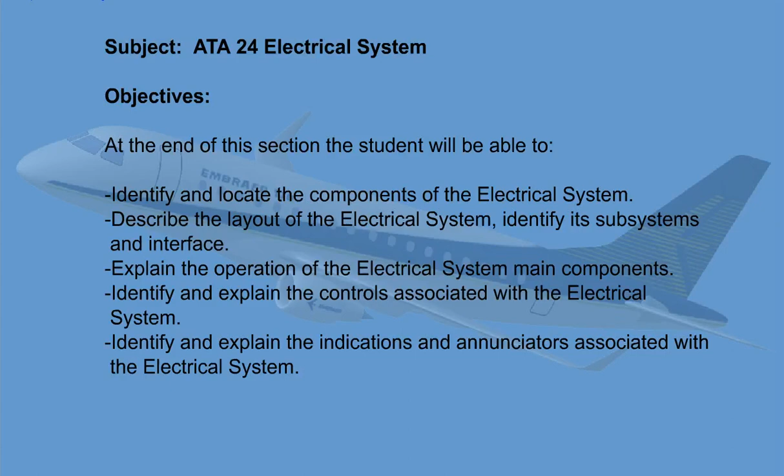The Electrical Power Generating and Distribution System, EPGDS, is comprised of AC and DC power sources. The AC system consists of two engine-driven integrated drive AC generators (IDGs), one auxiliary power unit-driven AC generator (APU generator), one ram air turbine-driven AC generator (RAT), and one AC external power input. The DC system consists of one DC external power unit and two nickel-cadmium batteries.

The EPGDS is normally operated in the automatic mode, whereby selection of the power source for each bus will be accomplished automatically.

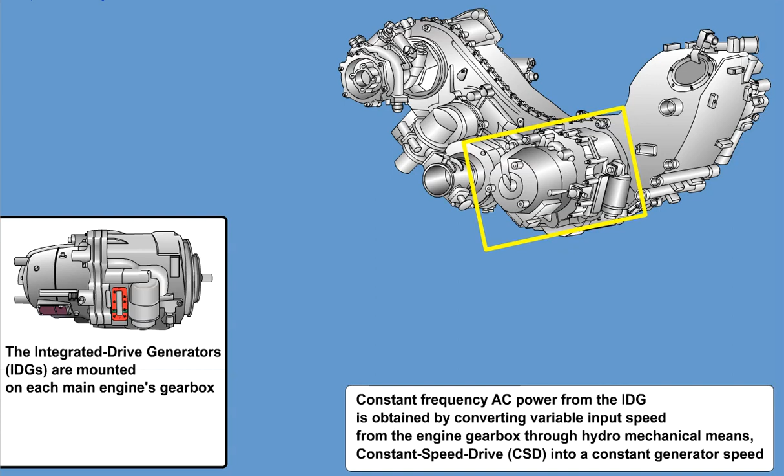The integrated drive generators, IDGs, are mounted on each main engine's gearbox. Constant frequency AC power from the IDG is obtained by converting variable input speed from the engine gearbox through hydromechanical means, constant speed drive (CSD), into a constant generator speed. The IDG operates at a rated 40 kilovolt amp, 115 volt AC, 400 Hz three-phase, with an input speed range of CSD 4618 to 8130 RPM and an output speed of CSD 12,000 RPM. The generator to the main engine gearbox uses a V-band mounting flange.

For safety, the IDG features an input shaft shear section. The IDG and CSD operation and lubrication oil system is connected to an external air-cooled oil cooler (ACOC) to maintain proper temperature. For maintenance purposes, the IDG requires visual inspection of the oil level, a changeable oil filter, and oil.

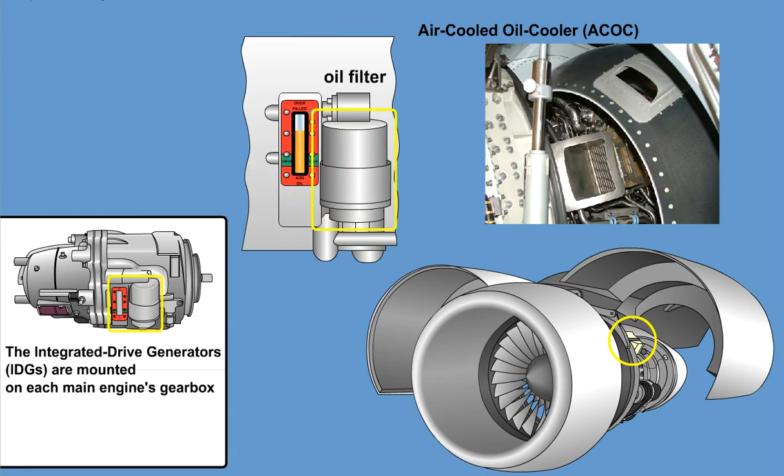Operation of the IDGs is monitored and controlled by the generator control units, GCUs. The two IDG selector knobs are located on the electric control panel in the cockpit and must be in the auto position during normal operation.

The auxiliary generator is mounted on the auxiliary power unit (APU). Constant 400 Hz frequency AC power is maintained by rotation of the generator with a constant APU engine speed. The APU generator is rated at 40 kilovolt amp, 115 volt AC, 400 Hz three-phase, at an APU engine output speed of 12,000 RPM. For safety purposes, an input shaft shear section protects the generator.

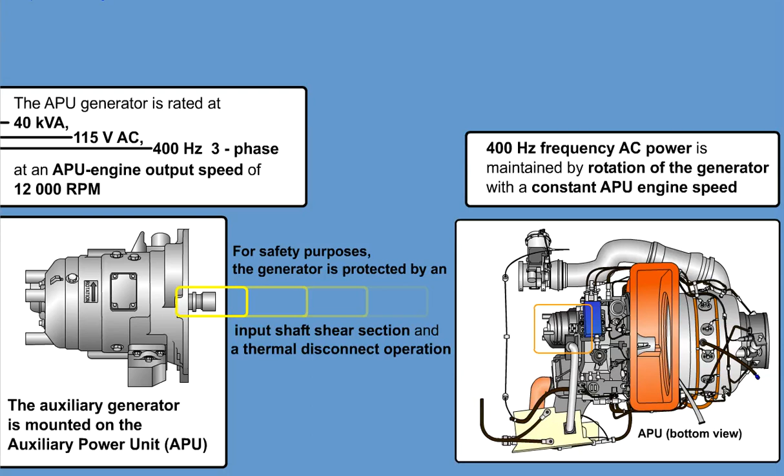The auxiliary generator lubrication system is integrated within the APU oil system. The APU generator control button is located on the electric control panel in the cockpit and must be in the latched position during normal automatic operation.

The ram air turbine system, also called the air-driven generator, is installed in a bay in the right side of the aircraft nose section. It provides emergency electrical power for the airplane in the event of a loss of all other sources of AC electrical power.

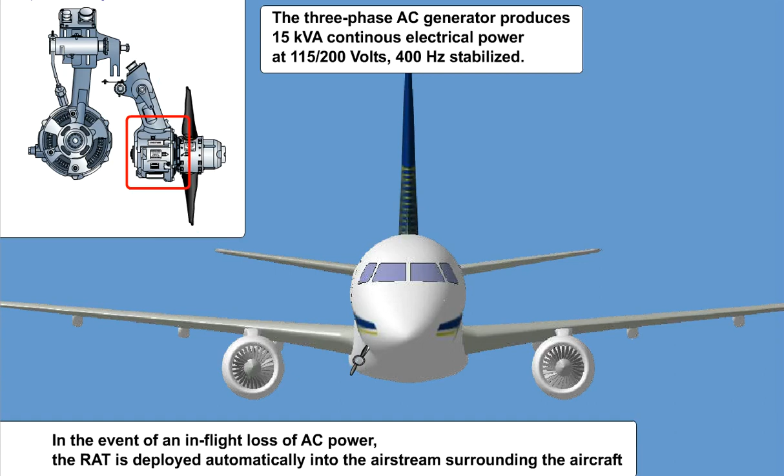In the event of an in-flight loss of AC power, the ram air turbine is deployed automatically into the airstream surrounding the aircraft. The kinetic energy of airflow across the turbine is converted into mechanical power to drive the AC generator. The three-phase AC generator produces 15 kilovolt amp continuous electrical power at 115 to 200 volts, 400 Hz stabilized. 400 Hz stabilization is accomplished by the automatic mechanically regulated variable pitch angle of the turbine blades.

The ram air turbine can also be deployed manually by a flight crew member using a deployment lever located in the console between the flight crew seats.

Electrical power from an external source may be supplied to the airplane through the associated AC or DC receptacle. Three-phase stabilized 115 volts AC 400 Hz is available. AC power is activated by switching on the ground service switch on the ground service panel. The operation status is indicated by illumination of the avail or in-use lamp. AC and DC ground service buses are powered independently of the other buses.

28-volt DC external power is on after activating the DC ground service switch, and will be indicated on the MFD synoptic page. This external power is used to start the APU. In case of releasing the parking brake with external power AC or DC connected to the airplane, the caution message GPU connected will be shown on the EICAS.

Two nickel-cadmium batteries, rated at 22.8 volt, 27 ampere hour, provide the essential loads in case of power failure of all generators. Battery 2 also provides power for APU start. Any available AC source will provide charging for both batteries.

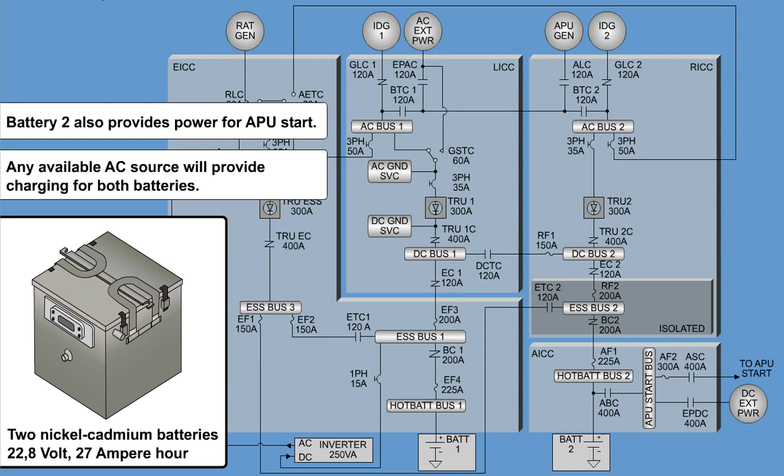The left and right integrated control centers are located in the temperature and pressure controlled mid-E bay. Access to this equipment is through the mid-E bay floor access hatch, located on the aircraft port side behind the left wing. Both integrated control centers provide control, protection, and distribution of primary AC and DC electrical power.

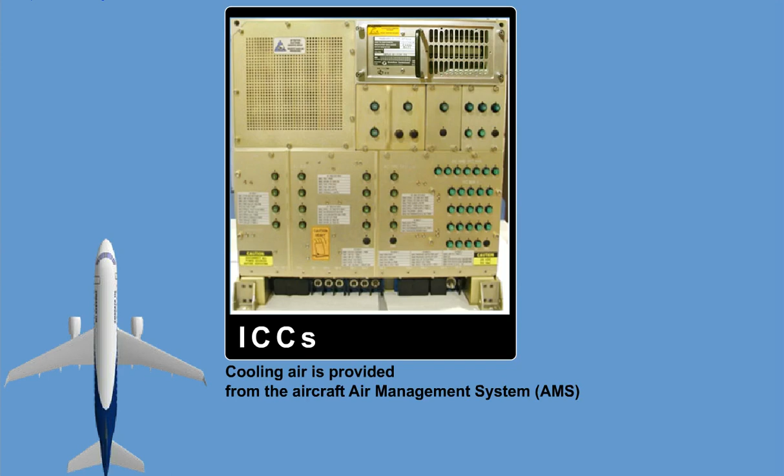The ICCs are mounted and bonded using 4 bolts through the 4 mounting feet. Cooling air is provided from the Aircraft Air Management System (AMS) and drawn through the TRU to ensure adequate heat dissipation.

All other ICC components are cooled by natural convection. All normal maintenance for removal and replacement of the TRUs, GCUs, EPM, contactors, relays, fuses, and circuit breakers is performed through the front of both ICCs.

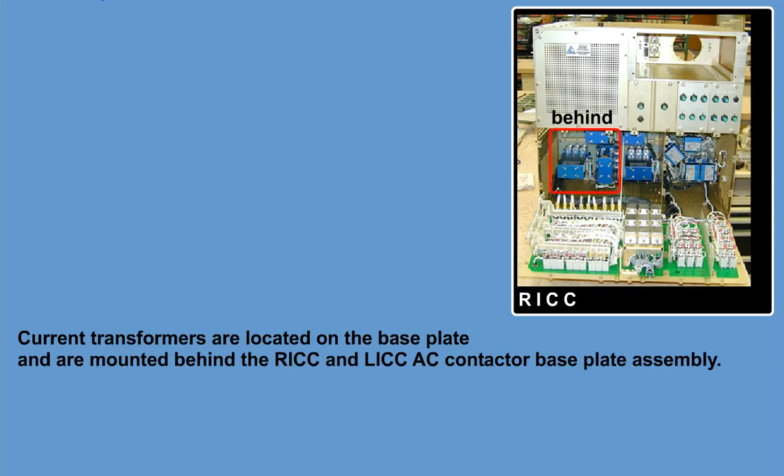The internal bus bars are not accessible without removing the entire integrated control center. The contactor baseplate assembly, terminals, and wire connections are not accessible. Current transformers are located on the baseplate and are mounted behind the right ICC and left ICC AC contactor baseplate assembly. Precautions should be taken to ensure proper electric power and that electrostatically sensitive device safety considerations are practiced while performing maintenance on the ICCs.

An ESD wrist strap should always be worn during removal of external power modules and generator control units, as these line replaceable modules are static sensitive modules.

The Emergency Integrated Control Center, EICC, is located in the temperature and pressure controlled forward E bay. Access to this equipment is through the forward E bay floor access hatch, which is located in front of the nose gear. The EICC provides control, protection, and distribution of primary AC/DC electrical power.

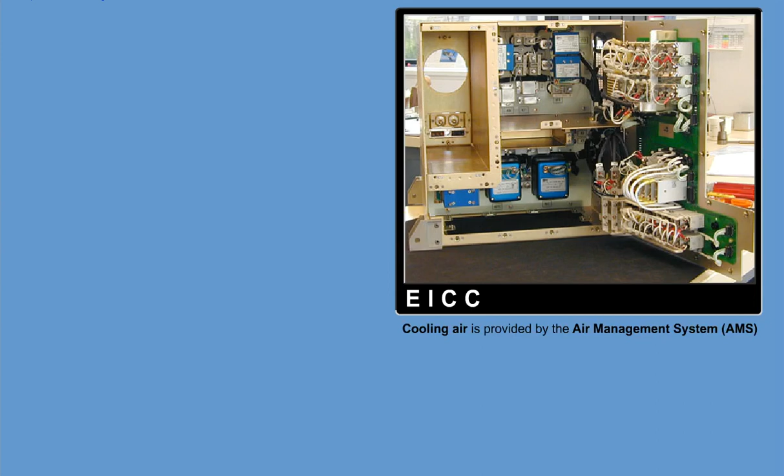The EICCs are mounted and bonded using 4 bolts through the 4 mounting feet. Cooling air is provided by the air management system and drawn through the TRU to ensure adequate heat dissipation. All other EICC components are cooled through natural convection.

All normal maintenance for removal and replacement of the essential TRU, contactors, relays, fuses, and circuit breakers is performed through the front of the EICC. Precautions should be taken to ensure proper power safety procedures are practiced while conducting maintenance on the EICC.

The Auxiliary Integrated Control Center, AICC, is located in the temperature and pressure controlled aft E bay. Access to this equipment is through an airplane panel located in the rear of the cabin. The AICC provides control, protection, and distribution of primary AC/DC electrical power.

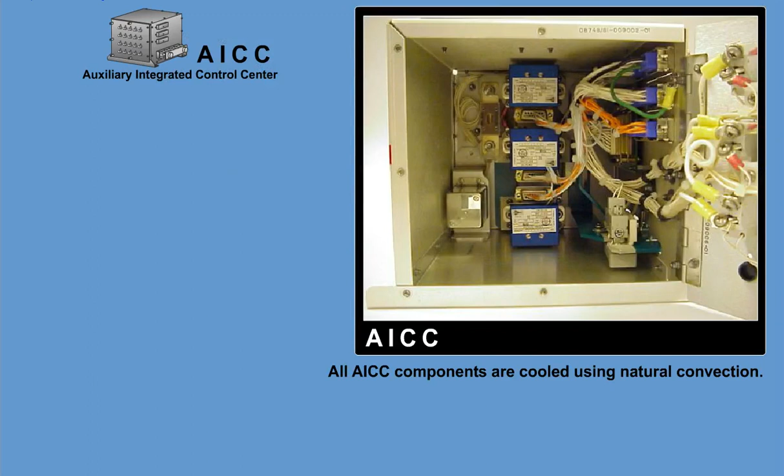The AICCs are mounted and bonded using 4 fasteners through the 4 mounting feet. All AICC components are cooled using natural convection. All normal maintenance for removal and replacement of the contactors, relays, fuses, and circuit breakers is performed through the front of the AICC. Precautions should be taken to ensure proper power safety procedures are practiced while conducting maintenance on the Auxiliary Integrated Control Center.

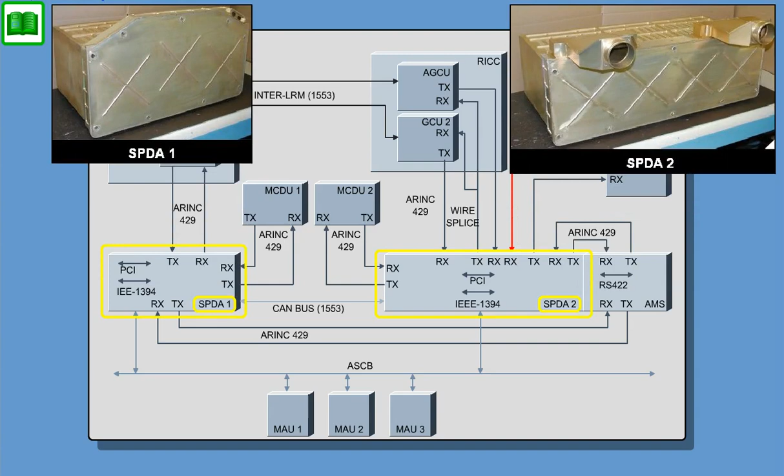Two secondary power distribution assemblies, SPDAs, are provided in the EPGDS, which interface with the Modular Avionics Units, MAU, the Integrated Control Centers, ICC, and various control display interfaces on the flight deck. These SPDAs are an integral part of the airplane utility management system to provide control and monitoring of several airplane systems.

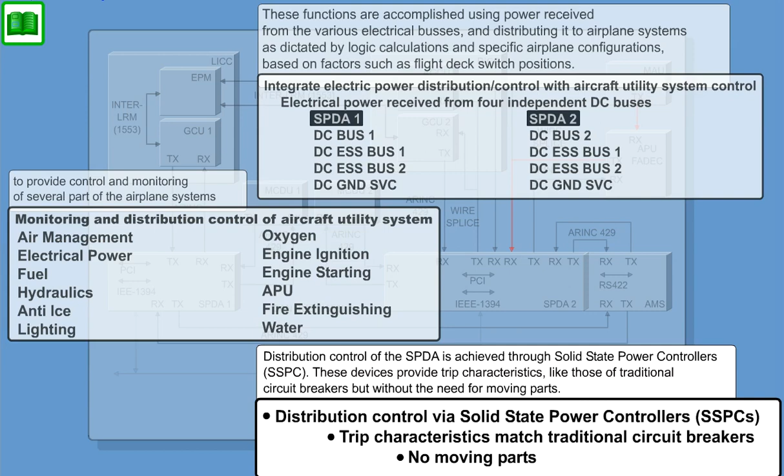These functions are accomplished using power received from the various electrical buses and distributing it to airplane systems as dictated by logic calculations and specific airplane configurations based on factors such as flight deck switch positions. Distribution control of the SPDA is achieved through solid-state power controllers, SSPCs. These devices provide trip characteristics like those of traditional circuit breakers, but without the need for moving parts.

The static inverter is located in the temperature and pressure-controlled forward E-bay. Access to the static inverter is through the forward E-bay floor access hatch, located in front of the nose gear. The static inverter is a line replaceable unit, LRU. The purpose of the unit is to convert 28-volt DC into 115-volt AC single-phase 400 Hz frequency stabilized power output.

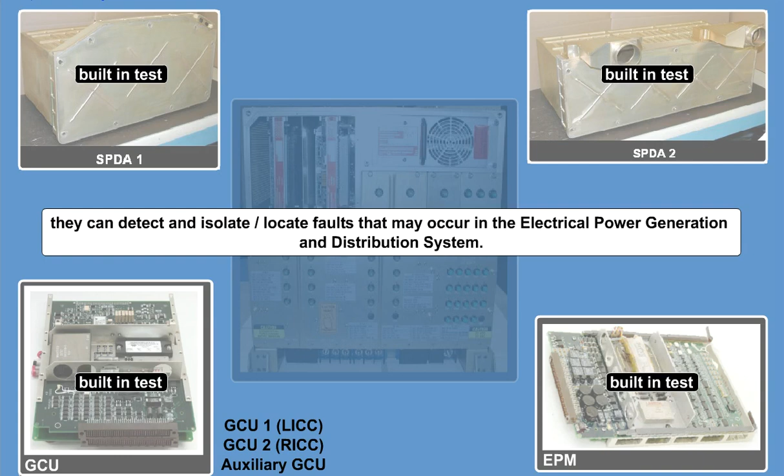The generator control units 1 and 2, the auxiliary GCU, the external power module, and secondary power distribution assembly 1 and 2 all have built-in test capabilities, which means that they can detect and isolate, locate faults that may occur in the electrical power generation and distribution system. This built-in test capability has 3 levels of functionality: continuous built-in test, fault-initiated test, and initiated test.

The central maintenance computer is a support tool for the technician, used to maintain reliability in aviation systems. The interface system section of the EPGDS is used to report faults or system status of associated member system units to the Central Maintenance Computer, CMC. The messages are presented on the ICUS display.

In normal operation, the information will be stored in a non-volatile memory when a fault is detected and confirmed. Some additional information such as airplane identification, date and time of flight, and flight phase will also be stored if this information is available from the airplane communication bus.

In maintenance operations, the CMC can command a member system of the airplane to perform initiated tests, to display system parameters, or upload memory contents of a member system.

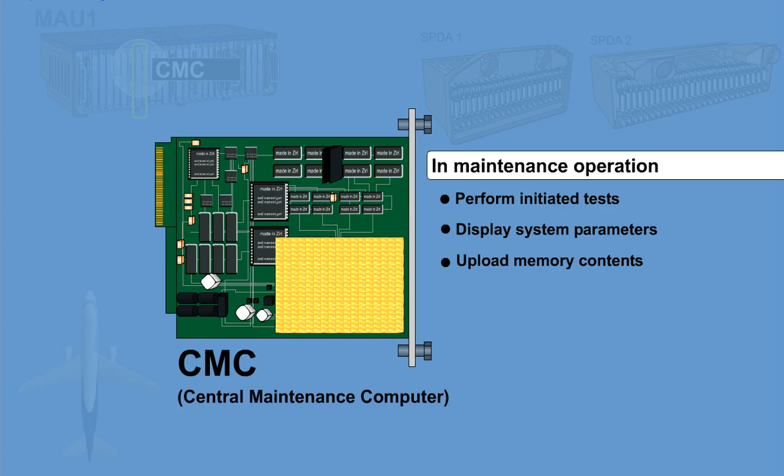Abnormal operational conditions of the EPGDS will be presented as an associated crew alerting system, CAS message, to the flight crew on the ICUS display.

35 CAS messages have been implemented in the system controller logic, including the GCU1, GCU2, AGCU, EPM, SPDA1, SPDA2, and associated MAUs. 6 of the messages have been designated at a warning level, 26 at a caution level, and 3 have been designated at an advisory level.

To ensure sufficient redundancy exists during dispatch per minimum equipment list rules, backup secondary controllers have appropriate logic for supporting the generation of necessary CAS messages.

The controls of the electrical system are on the overhead cockpit control panel and have 2 subsystems: the electrical AC system and the electrical DC system.

The IDG selector knobs allow control of the IDGs. Positioning the selector knobs in a normal auto position will allow automatic operation of the electric power generation and distribution system, EPGDS. If the selector knobs are in the off position, IDGs will be tripped offline and de-excited.

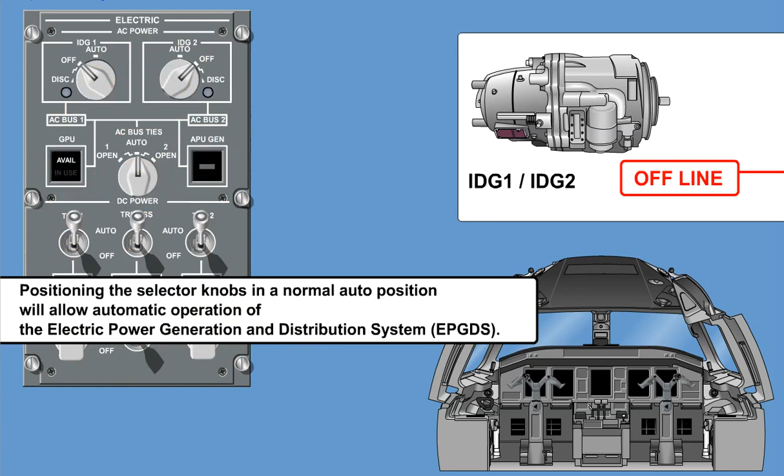An amber LED illuminates beside the associated selector knob to indicate which IDG has failed. By selecting the knob to the disc position and holding it for 1 second, the IDG will be mechanically disconnected. Note, only authorized maintenance personnel on ground can reset a disconnected IDG.

The ground power unit switch allows activation of the external AC power unit, AC GPU, from the flight deck. This switch controls the external power AC contactor, EPAC, part of the Left Integrated Control Center, LICC.

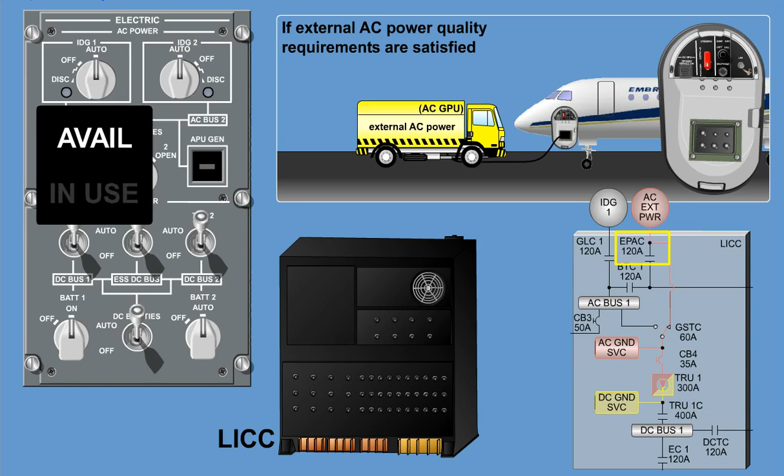If external AC power quality requirements are satisfied, but the GPU switch is in the unlatched position, then the GPU avail lamp will be illuminated and the EPAC de-energized open.

Moving the GPU switch from an unlatched position to the latched position will allow automatic EPGDS operation for powering with external AC power. And if power source priority conditions are met, the EPAC will close.

If the GPU switch is latched when external power is applied to an unpowered aircraft, cycling the GPU switch from an unlatched position to the latched position will be required for automatic EPGDS operation. Once the EPAC closes, the GPU avail lamp will extinguish, and the GPU in use lamp will illuminate.

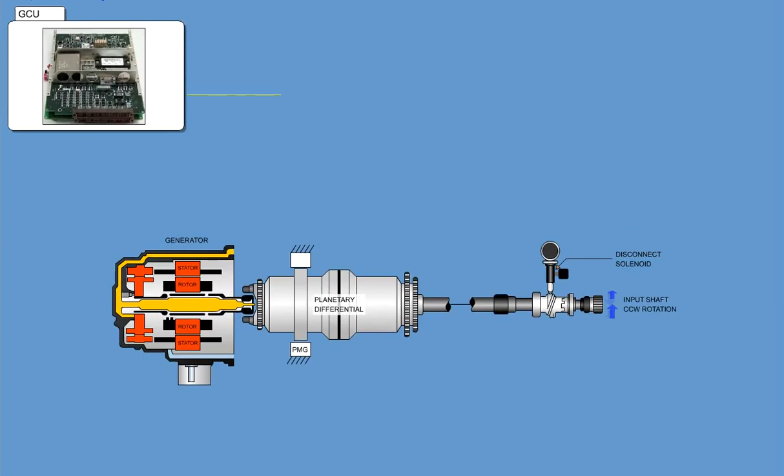The GCU supplies an electrical signal to a servo valve inside the CSD. This servo valve then controls, through a control cylinder, the hydraulic log unit, which operates in a clockwise or counterclockwise direction. Because the hydraulic log unit is connected to another input of the planetary differential gear, the generator RPM increases or decreases less than the input shaft RPM. As a result, the generator frequency stays constant.

The hydraulic log unit operates at 240 to 280 psi pressure. This oil pressure is maintained by a charge pump and charge relief valve. The charge oil is also used to cool and lubricate the generator and the other CSD components. It is not part of the engine oil circuit. The oil flows between 7 and 12 gallons per minute.

Drain oil from the generator and sump is supplied through a scavenge filter to an external oil cooler by 3 pumps, which are driven by the accessory drive gear on the planetary differential gear at a constant speed. These pumps are the generator scavenge pump, sump scavenge pump, and the inversion scavenge pump.

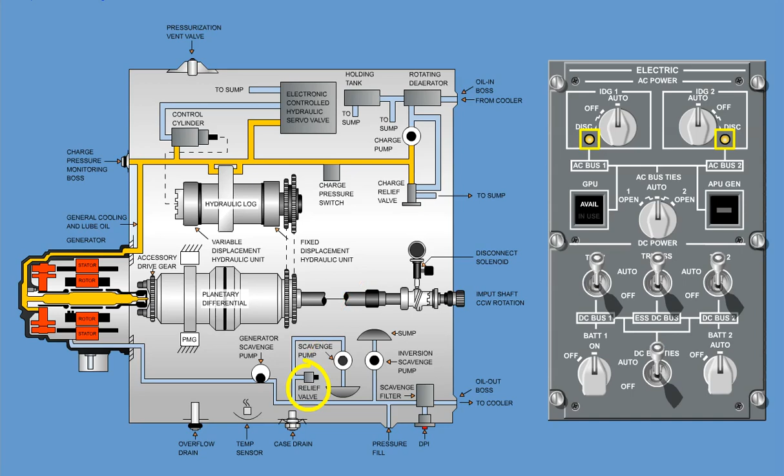The entering oil passes through a rotating deaerator. This device extracts air from the oil with centrifugal force. The deaerated oil exits the deaerator discharge and enters the charge pump. The overflow oil leaving the deaerator that does not feed the charge pump fills a holding tank inside the CSD housing. The holding tank is an all-attitude reservoir designed to assure a continuous supply of oil charge and lubrication oil through all flight attitudes, including negative G conditions.

In case of malfunction, the IDG can be manually disconnected through a switch located on the cockpit control panel, controlling the electric-mechanical disconnect mechanism, which is part of the IDG input shaft. This mechanism consists of a solenoid-operated, spring-loaded disconnect plunger, camshaft, and reset ring.

The manual disconnect should be performed if the associated cockpit IDG disc amber indicator light and/or the IDG oil CAS message is displayed. These indicate low oil pressure or high oil temperature in the IDG.

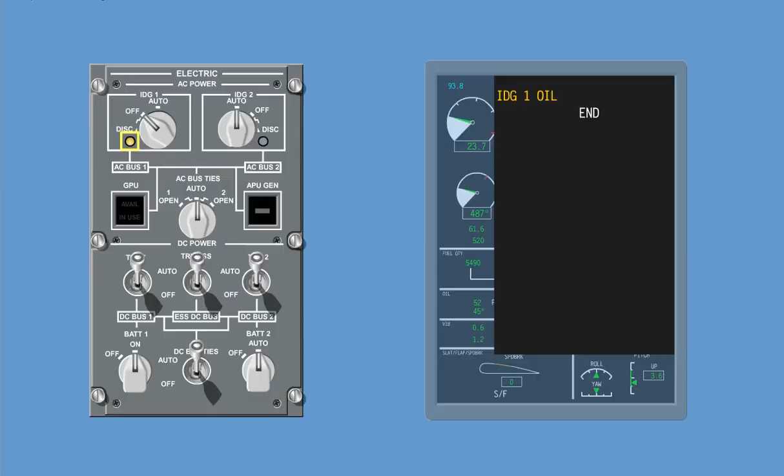In case the operational oil pressure in the IDG drops below 140 plus or minus 25 psi, the charge pressure switch inside the CSD closes. The GCU interprets this as a low oil pressure condition.

In case oil temperature in the IDG sump, sensed by the temperature bulb, reaches 335 degrees Fahrenheit (168 Celsius), an IDG over temperature condition is interpreted by the GCU. In both cases, the GCU will send a corresponding signal over ARINC 429 to the associated SPDA.

The SPDA illuminates an amber lamp on the IDG disc switch. This lamp illuminates if the following SPDA input signals are active: IDG over temperature signal or low oil pressure signal, and IDG not already disconnected, and IDG input speed greater than 4,500 RPM, which senses that the engine is running.

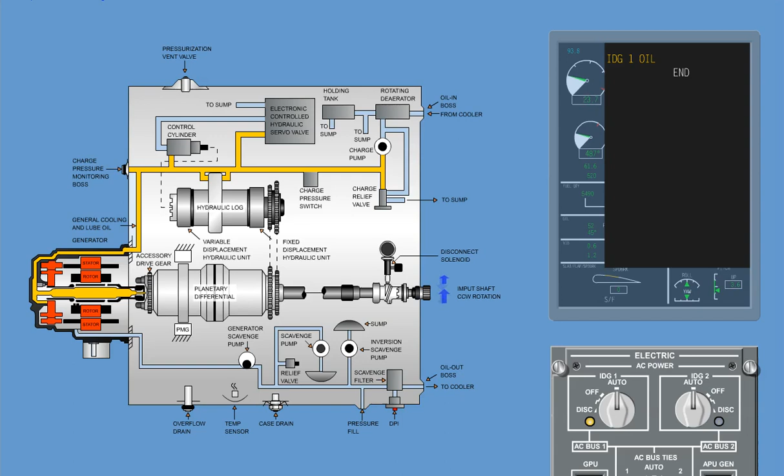Illumination of the lamp indicates which IDG has failed. By selecting the switch to the disc position for more than 1 second, the disconnect mechanism inside the CSD provides a means of separating the transmission and generator shaft from the IDG input shaft.

Selecting the switch to the disc position causes the solenoid pin to retract. This action releases a plunger which engages the cam on the transmission shaft. As the shaft rotates, the plunger rides along the cam, moving the shaft axially away from the input shaft. The IDG input shaft part remains engaged with the drive spline of the gearbox.

A signal is also passed over ARINC 429 to the respective GCU to trip the generator control relay and the generator line contactor.

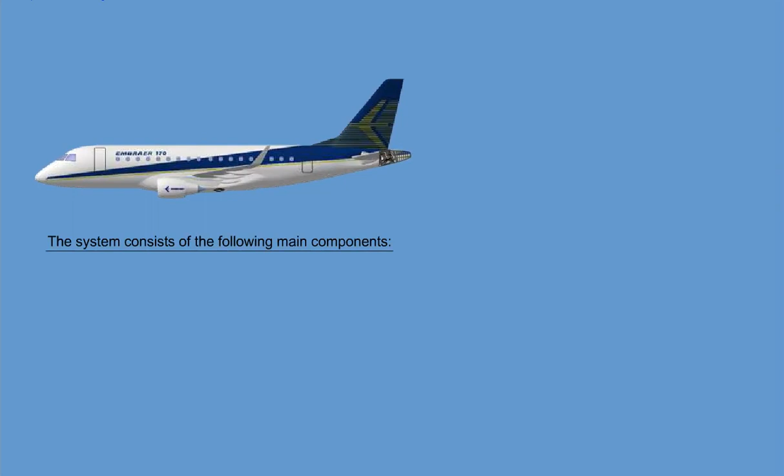The APU AC generation system is used primarily when the airplane is on ground, or as a backup source in flight. The system consists of the following main components: the generator unit (auxiliary generator), the generator control unit (auxiliary GCU), the line contactor (ALC), the current transformer (auxiliary generator CT), the APU generator switch, and the crew alerting system.

The APU auxiliary generator is a 4-pole, 3-phase, brushless type, oil-cooled constant-speed generator, and is rated at 30 to 40 kVA, 115 to 200 volts AC, 400 Hz.

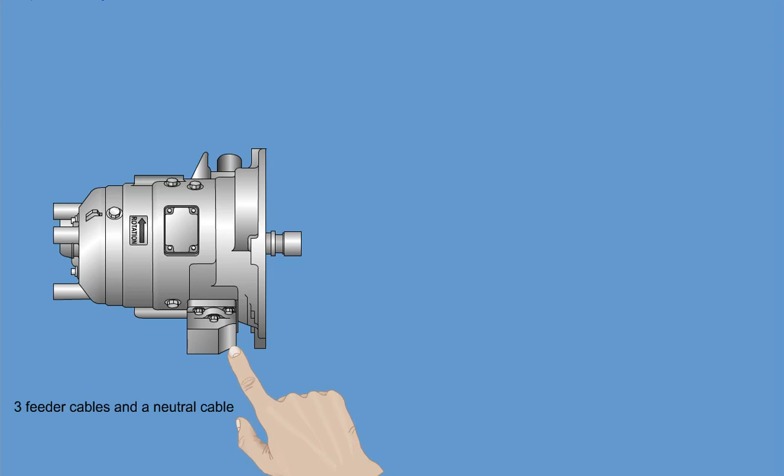The auxiliary generator is installed on the gearbox of the auxiliary power unit. The generator unit and a seal plate are mounted to the gearbox via threaded studs with washers and nuts. 3 feeder cables and a neutral cable are attached to the main terminal block of the generator.

An external connector provides AC output signals from the permanent magnet generator (PMG) stator to the generator control unit to adjust the exciter field DC voltage. For safety, the generator is protected by an input shaft shear section.

The auxiliary generator control unit is a line replaceable module, LRM, and is located in the Right Integrated Control Center, RICC.

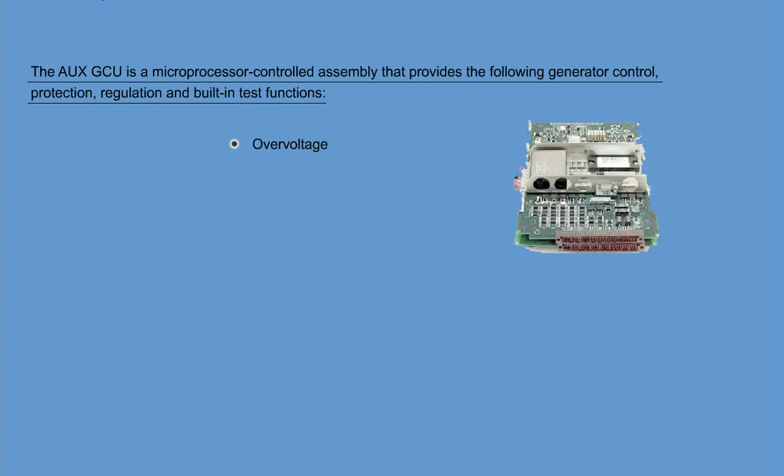The auxiliary GCU is a microprocessor-controlled assembly that provides the following generator control, protection, regulation, and built-in test functions: over voltage, under voltage; over frequency, under frequency; over current; phase sequence; differential fault; shorted internal wiring; shorted rotating diode system; inadvertent paralleling trip; open phase, and failure of the central processing unit of the GCU.

If a fault occurs, the GCU will command the auxiliary line contactor to open and stop AC power supply to the aircraft AC power system.

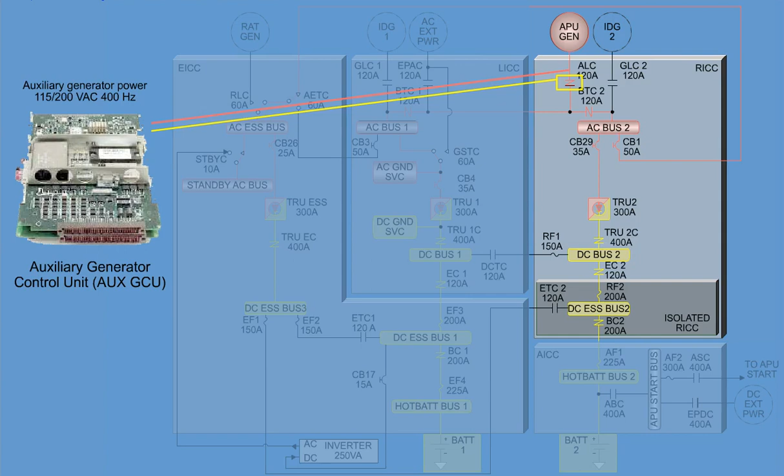The auxiliary generator line contactor is a line replaceable module located in the Right Integrated Control Center. The ALC is normally held open by the auxiliary generator control unit. When the auxiliary GCU has determined that the auxiliary generator power is at 115/200 volts AC, 400 Hz, it sends a signal to close the auxiliary generator line contactor, which allows the auxiliary generator to supply AC power to AC bus 1 and AC bus 2.

The two-position APU generator switch, located on the electrical control panel, controls the APU generator. In the normally latched position, the auxiliary generator operates automatically and provides power to the aircraft AC distribution system. The status lamp of the switch is off in this position.

In the unlatched position, the flight crew can manually de-energize the auxiliary generator, which opens the generator control relay, GCR, and the auxiliary line contactor, ALC. This position is indicated by illumination of a striped bar.

The emergency AC generation system provides emergency electrical power for the airplane in the event of a loss of all other sources of AC electrical power. The AC emergency system supplies the AC Essential Bus.

It consists of the following main components: the ram air turbine, the integrated control center, and the associated generator control unit.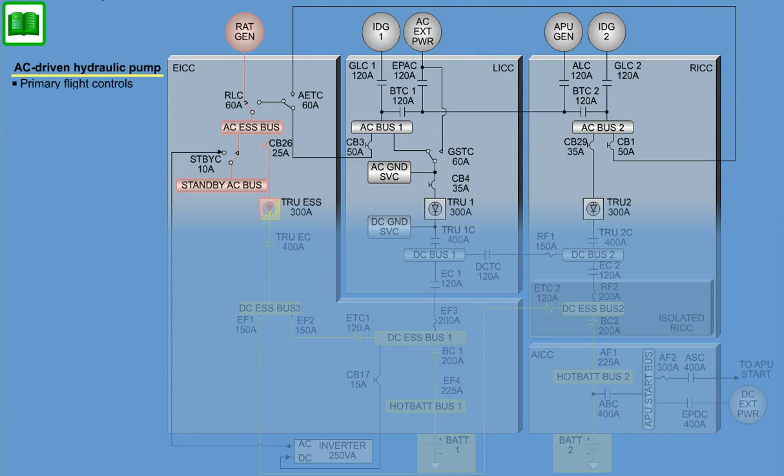In case of loss of AC electricity in flight, the ram air turbine AC power will provide the following airplane systems: the AC-driven hydraulic pump for the primary flight controls and the landing gear, the engine exciters, 1A and 2A, the operation of the essential lighting system, and the operation of the essential avionics and communication equipment.

The ram air turbine, RAT, system, also called the air-driven generator, ADG, is installed in a bay in the right side of the aircraft nose section. It provides emergency electrical power for the airplane in the event of a loss of all other sources of AC electric power.

In the event of an in-flight loss of electric power, the RAT is deployed automatically into the airstream surrounding the aircraft. The kinetic energy of airflow across the turbine is converted into mechanical power to drive the AC generator.

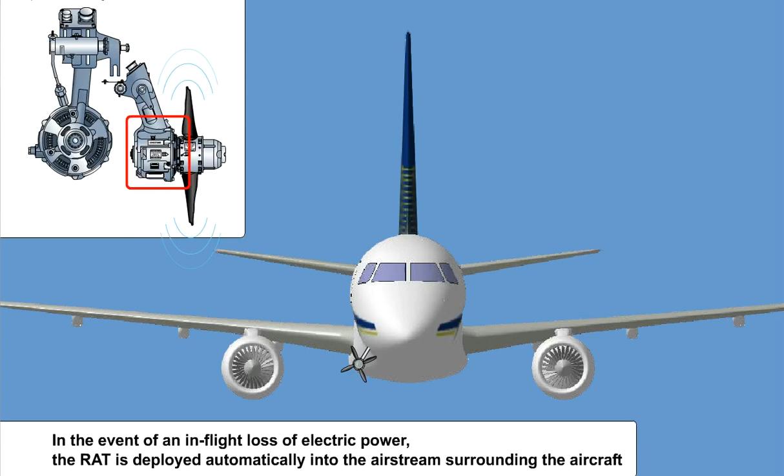The turbine assembly consists of two turbine blades connected to a mechanical governor, installed inside a hub housing assembly, which is connected to the generator shaft.

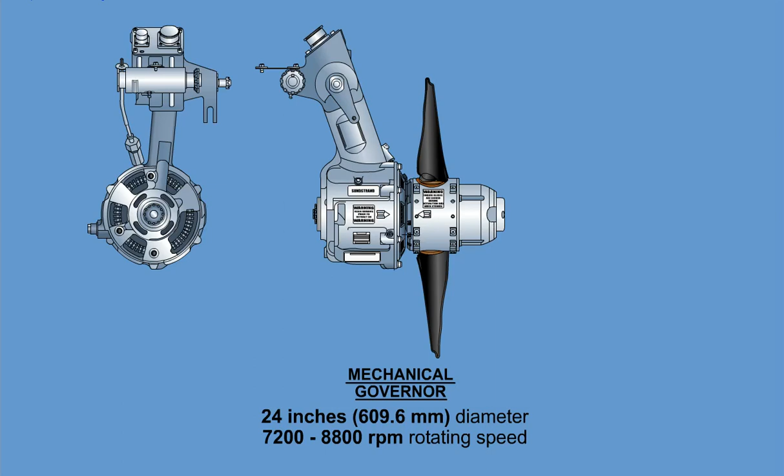The outside diameter of the turbine blades is 24 inches, 609.6 millimeters. The mechanical governor maintains the rotating speed of the turbine within 7,200 and 8,800 RPM by the automatic mechanical regulated variable pitch angle of the turbine blades. This rotation speed depends upon the airplane airspeed, altitude, and electrical load.

The air-driven generator assembly is a three-phase, air-cooled brushless AC machine. It produces 15 kilovolt amp continuous electrical power at 115, 200 volts, 360 and 440 hertz.

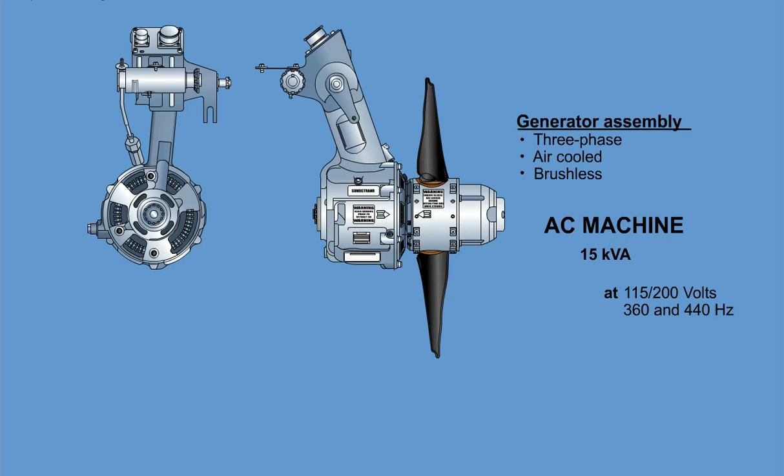The ram air turbine deploys automatically in case of an airborne loss of AC power from both AC buses. The ram air turbine can also be deployed manually by the flight crew using a deployment lever located in the console between the flight crew seats.

The distribution of emergency AC power is controlled and monitored through contactors, circuit breakers, relays, and protections, which is provided by the ram air turbine generator control unit and the emergency integrated control center.

The main stator in the generator of the ram air turbine has an electrical heater installed to prevent moisture from freezing in the air gap between the stators and rotor during cold temperatures and icing conditions. This feature helps assure smooth startup at deployment.

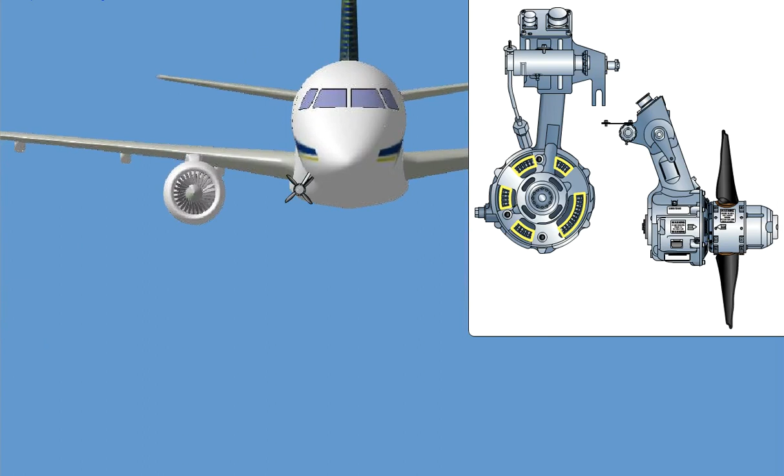The ram air turbine will remain deployed and operational during the entire flight and the landing phase. After a ram air turbine system inspection procedure, maintenance technicians can restow the ram air turbine with the restow pump.

The static inverter is located in the temperature and pressure-controlled forward E-bay. It can be accessed through the forward E-bay floor access hatch located in front of the nose gear.

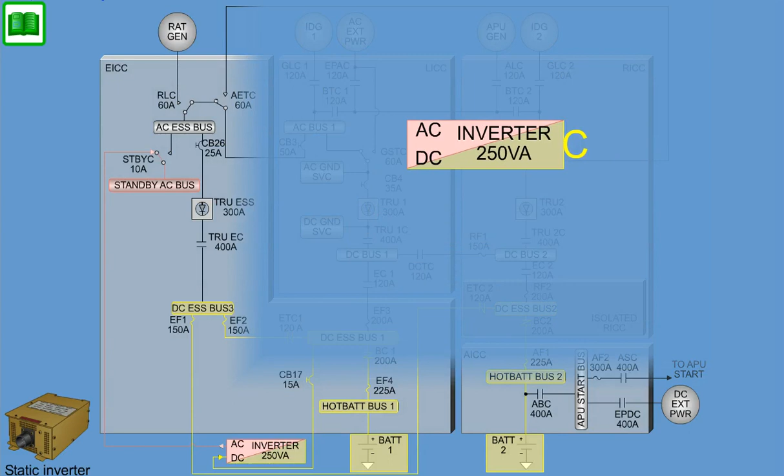The static inverter is a line-replaceable unit. Its purpose is to convert 28-volt DC into AC in order to provide the standby AC bus with single-phase 115 volts RMS, 400 Hz AC stabilized power output.

The capability to convert DC into AC is 250 volt amps of electrical power.

Operation of the inverter is controlled by Secondary Power Distribution Assembly 1. This unit controls the on-off logic of the static inverter, based upon the inverter's internal fault monitor and the number of AC sources available during in-flight operation.

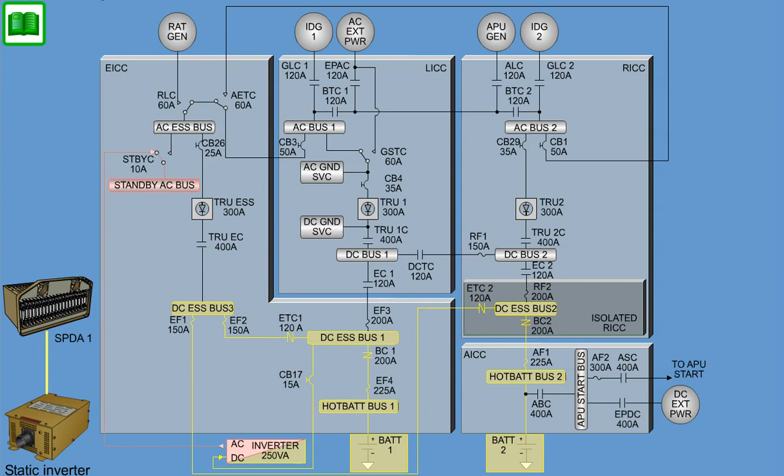SPDA-1 will set the inverter to off status during normal operation of the Electrical Power Generation and Distribution System, EPGDS. SPDA-1 will set the inverter to on status in case only one main AC source is available: IDG1, IDG2, or the APU generator.

If the internal fault monitor of the inverter detects a problem, a discrete status signal will inform the SPDA-1 to shut down the inverter.

DC power is generated by 3 transformer rectifier units, 2 accumulator batteries, or an external DC power connection.

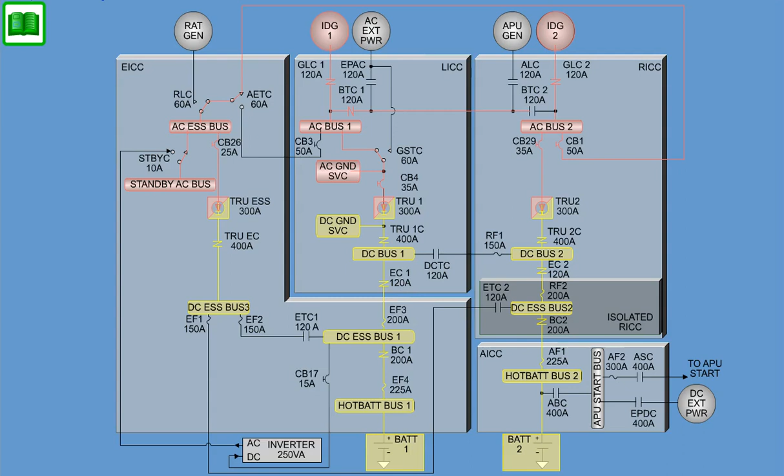For operation of DC-powered airplane equipment, the conversion from AC power to DC power is provided by 3 transformer rectifier units. Batteries 1 and 2 are used to back up all DC buses to ensure continuous supply for DC loads. Battery 2 also provides energy necessary for an APU start.

DC external power is provided by a ground power unit, GPU, and is only used to perform an APU start.

The DC system of the airplane operates on 28-volt DC stabilized. There are 3 transformer rectifier units as main DC power sources. The TRUs are located inside the associated integrated control centers.

There are also 2 nickel-cadmium batteries and 1 external DC power plug.

DC power is generated by conversion of AC to DC by the TRUs to supply the associated DC bus. The input of each TRU is 115 volt AC, 400 Hz frequency stabilized, and the output is 28 volt DC regulated up to 300 amps of current.

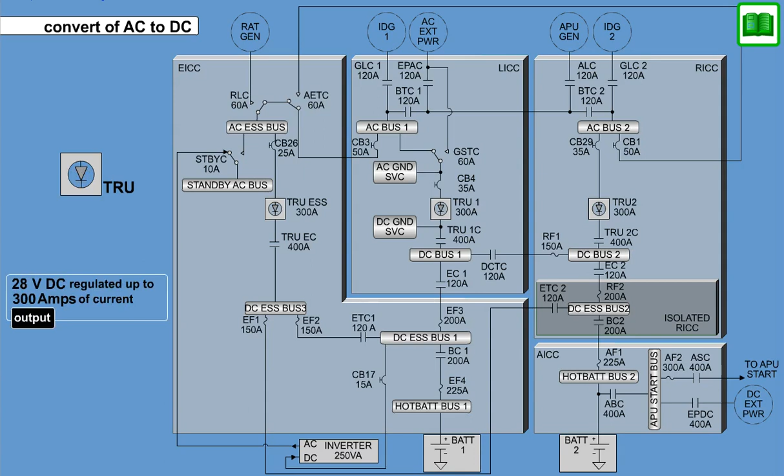Both nickel-cadmium batteries have 19 accumulator cells. Battery 1 is located in the forward E-bay, and Battery 2 is located in the aft E-bay.

In normal operation, any available power source will provide charging current for batteries 1 and 2, except for the DC external power. Both batteries are in operation to back up all DC buses, ensuring a break-free environment for DC loads. Battery 2 also provides electrical power for an APU start through the APU start bus when the electrical system is automatically isolated from Battery 2.

The only function of the DC external power is to supply DC power to the APU start bus for an APU start. External DC power is controlled by dedicated system relay logic.

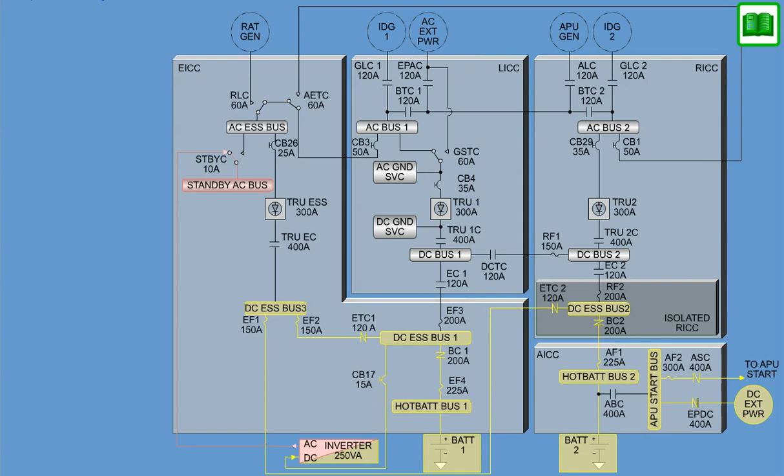Two nickel-cadmium NiCad accumulator batteries are provided for powering essential loads if transformer rectifier unit power is not available. Batteries 1 and 2 are used to back up all DC buses, to ensure a break-free environment for DC loads.

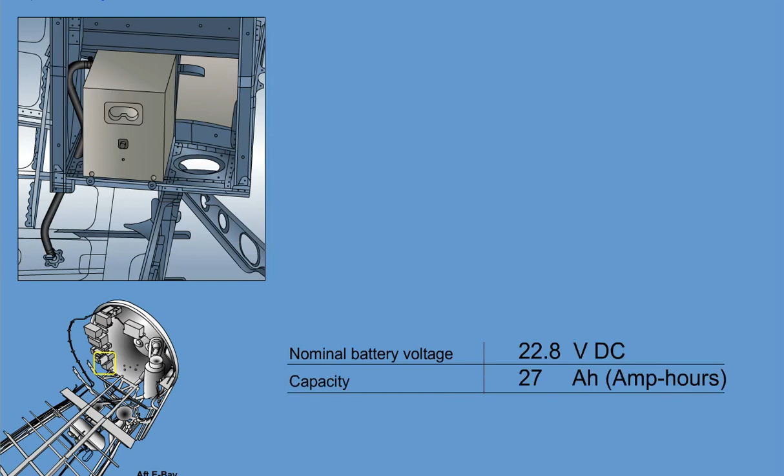Each battery consists of a steel case containing 19 semi-open NiCad cells. The cells are connected to each other in series by copper bus bars. The nominal battery voltage is 22.8 volts DC, with a capacity of 27 amp hours, at a 1-hour discharge rate.

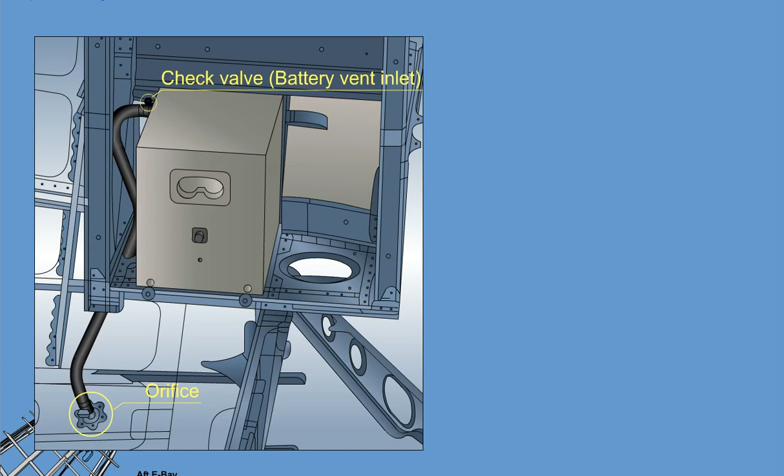Adequate battery ventilation is provided through a tube interconnecting the battery venting nozzle to the fuselage surface. A calibrated orifice close to the fuselage and a check valve on the battery vent inlet assure that gases emitted by the batteries under normal or abnormal conditions will not accumulate in hazardous quantities.

Battery 1 is located in the forward E-bay directly below the SPDA-1 unit. It provides stored energy to selected equipment during normal operations and during flight in the absence of all other airplane electrical power. Battery 2 is located in the aft E-bay.

It also provides the power used for an APU start through the APU start bus during ground or flight operations, when the electrical system is automatically isolated from Battery 2.

Each battery is fitted with 2 temperature sensors, which are continuously monitored by the modular avionics units. Both sensors are used to provide continuous indication of battery temperature to the multifunction display, and to display an EICAS warning message, battery overtemp, in red if battery limits are exceeded.

The higher of the 2 temperature values sensed is the one utilized for indication and alarm. Whenever a battery over temperature condition is sensed, the pilot should isolate the battery from the charging source.

Battery over temperature will never generate sufficient heat to damage the battery's surroundings, including those caused by a short circuit at its terminals or to any of its cells. Any mechanical deformation of the battery will be contained within its steel case.

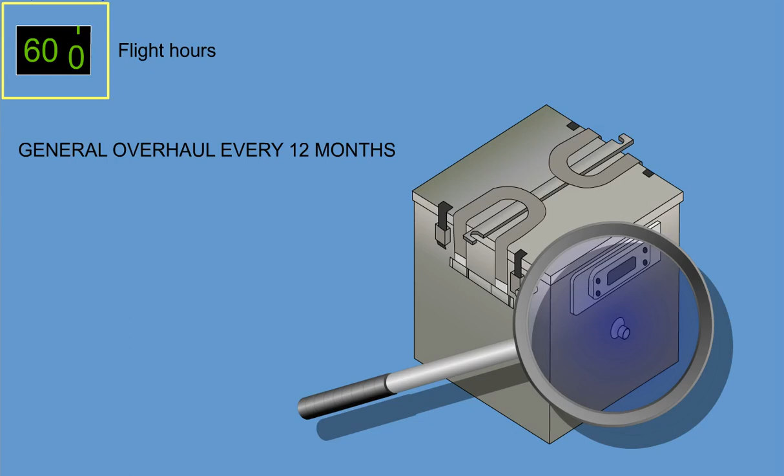Maintenance requirements for the battery include a regular check every 600 flight hours and a general overhaul every 12 months. The battery must be removed from the airplane for both the regular check and the general overhaul.

The regular check consists of the following: exterior cleaning, voltage check, nut tightness check, discharge and shorting of all cells, insulation check, recharge, adjustment of electrolyte level, capacity check, and cleaning of battery vents.

The general overhaul consists of the following: voltage check, nut tightness check, discharge assembly and shorting of all cells, thorough cleaning and inspection of all components, check of the thermal sensors, replacement of faulty components, assembly of all battery components, insulation check, recharge and adjust the electrolyte level of all cells, capacity check of battery, and cleaning of battery vents.

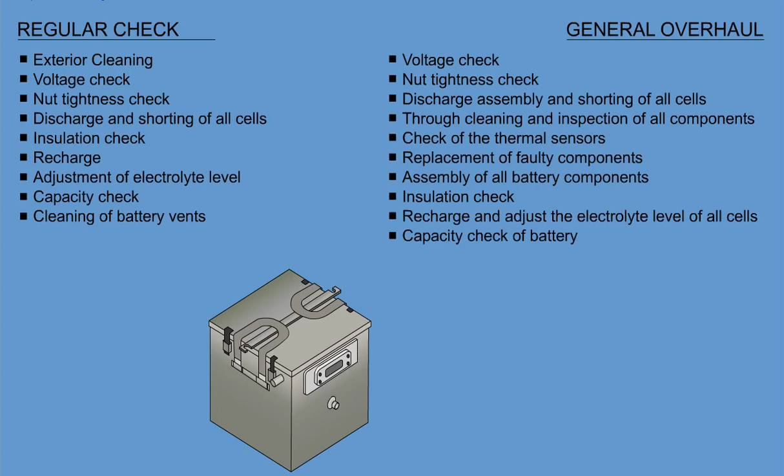The airplane gets its external AC power from the Ground Power Unit, GPU. The 3-phase 115-volt 400 Hz external AC power is used for ground maintenance and flight preparation. External DC can be used for APU start.

External 3-phase 115-volt AC 400 Hz may be connected to the aircraft via a receptacle on the left-hand side of the fuselage. The external AC is used to power the AC ground service bus and the DC ground service bus without powering any other buses on the airplane.

The operation of the system is controlled by the external power module, EPM. Electrical power from an external source may be supplied to the airplane through an external power DC contactor, EPDC, receptacle, located on the left-hand side of the fuselage. It allows 28-volt DC to be supplied to the APU start bus for APU start.

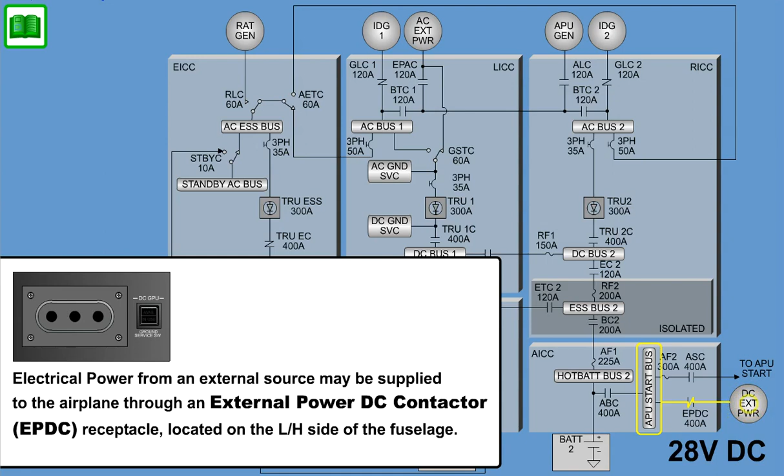The external DC power is used to power the APU start bus. The external DC power is operated by a system relay logic, which is part of the Auxiliary Integrated Control Center, AICC. The plugged-in 3-pin external power plug activates the voltage sensor relay unit in order to monitor the quality of the supplied DC.

The DC GPU ground service switch on the DC GPU power panel is the manual control and will indicate avail when acceptable external DC quality exists. Pressing the switch will cause an in-use indication to illuminate.

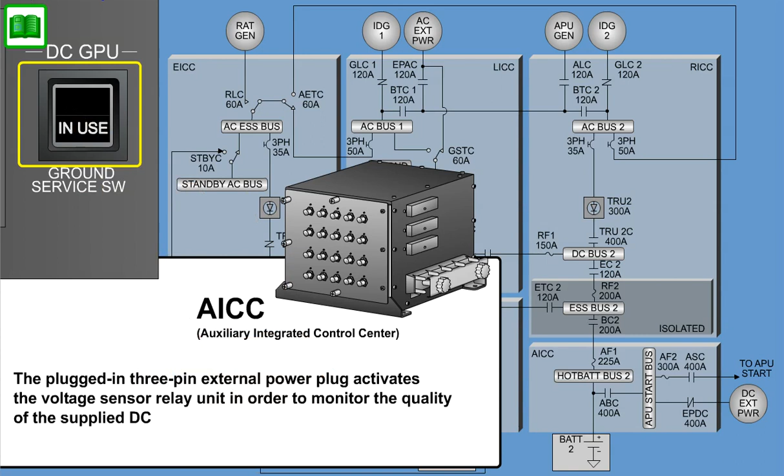A DC external power switch is located on the DC external power panel. It is a push-button latching switch. This switch provides control of the external power DC contactor, EPDC. This is controlled by a power relay logic of the external power module inside the Auxiliary Integrated Control Center.

If acceptable external DC power quality exists, with the DC external power switch in the off position, the DC external power available lamp, located on the DC external power panel, will illuminate via aircraft wiring, and the external power in use lamp will be off.

When the external DC power source is plugged in, power quality is acceptable, and the DC external power switch is closed, the external power DC contactor will close. With the EPDC closed, the DC external power in use lamp, located on the DC external power panel, will illuminate via aircraft wiring, and the avail lamp will be off. With the DC external power switch in the off position, the EPDC will open.

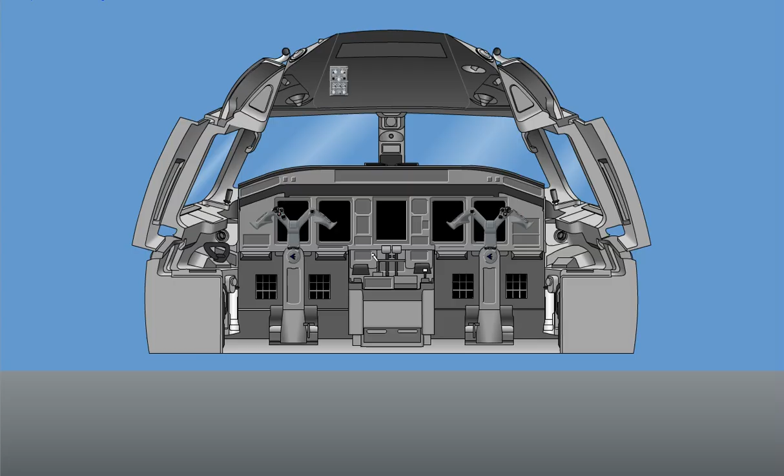The cockpit control panel's ground power unit, GPU, switch provides control of the external AC power. Once the GPU is connected and power quality requirements are satisfied, a GPU avail indication will illuminate on the depressed GPU switch. Pressing the GPU switch will allow automatic EPGDS operation with external AC power, and a GPU in-use indication will illuminate.

A momentary action-type ground service switch is located on the AC external power panel. It is marked as an AC GPU and includes the avail and in-use indicator lights. This ground service switch provides control of the ground service transfer contactor, GSTC, through the external power module, EPM, inside the left integrated control center, LICC.

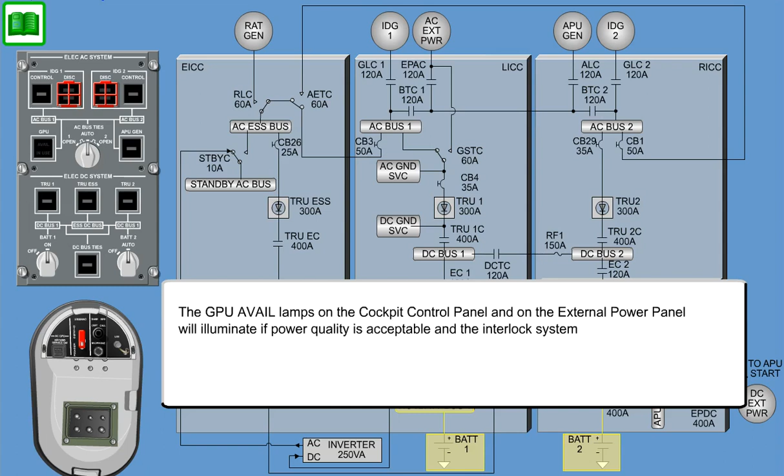The GPU avail lamps on the cockpit control panel and on the external power panel will illuminate if power quality is acceptable, and the interlock system, pin EF, on the external power plug, is in order.

When the external AC power unit is plugged in, power quality is acceptable, AC bus 1 is unpowered, and the momentary ground service switch is toggled, the ground service transfer contactor will close. The GPU in-use lamps on the cockpit control panel and on the external power panel will illuminate with the ground service transfer contactor closed. This closure of the GSTC results in only the AC ground service bus and the DC ground service bus being powered.

If AC bus 1 is powered, then the ground service transfer contactor will open. If the GSTC is energized and the ground service switch is again toggled, the GSTC will move to the rest position.

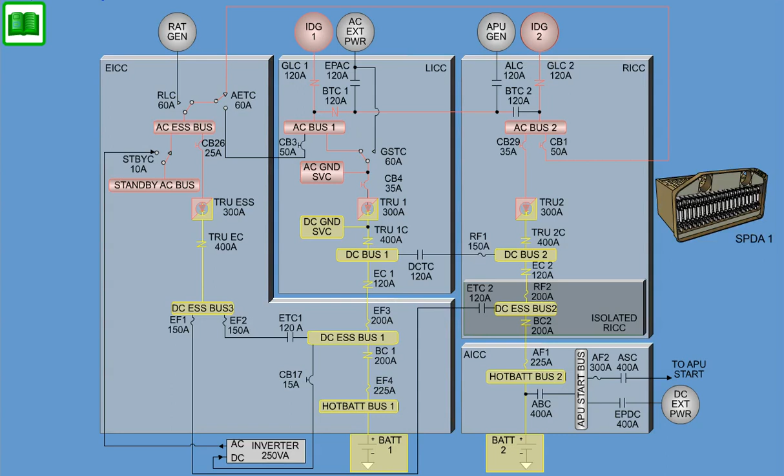AC power distribution is performed by subassemblies located in the left integrated control center, right integrated control center, emergency integrated control center, and by secondary power distribution assemblies 1 and 2. AC power for the airplane is received from two main AC channels:

one auxiliary channel, one external power channel, and a ram air turbine channel.

Each main AC channel receives power from associated integrated drive generators 1 and 2 through a generator line contactor, GLC1 and GLC2, and distributes AC power via AC bus 1 and bus 2.

The auxiliary channel receives power from the auxiliary power unit, APU, through an auxiliary line contactor and distributes AC power through a bus tie contactor, BTC1 and 2, and via AC bus 1 and 2.

External AC ground power can also be supplied to the airplane through the external power alternating current contactor, EPAC. The ram air turbine channel receives power from the RAT generator through the ram air turbine line contactor and distributes AC power via AC essential bus.

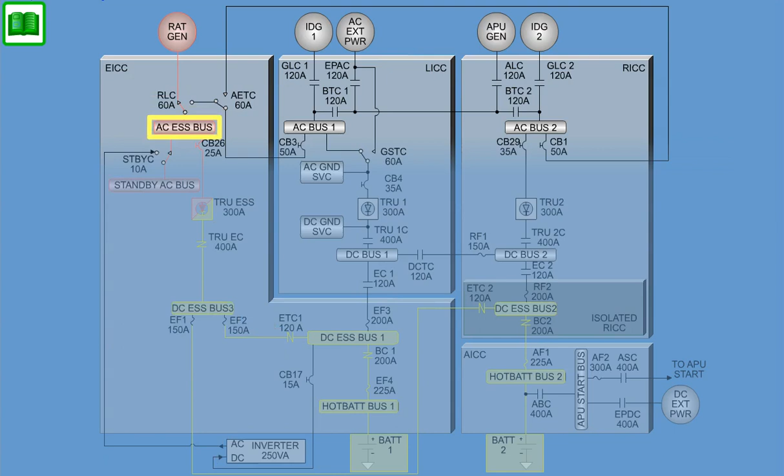The AC power distribution supplies AC power to various airplane loads through several AC buses. The AC buses are physically and electrically segregated to be sure that the loss of one AC bus will not affect the other. The two main AC buses are the left main AC bus 1, which is located in the left integrated control center, and the right main AC bus 2, located in the right integrated control center.

The main buses supply AC power to various switched airplane loads, such as the galley feeds, galley heaters, AC fuel pumps, windshield heater control units, airplane lights, AC fans, and lavatory heaters. They also supply AC power to other loads through the secondary power distribution assembly, SPDA1 or SPDA2.

The AC ground service bus is supplied out of AC bus 1 or external AC source through the ground service tie contactor. The AC essential bus, located in the emergency integrated control center, is supplied through alternating current essential tie contactor. The standby AC bus is supplied out of the AC essential bus through the standby contactor.

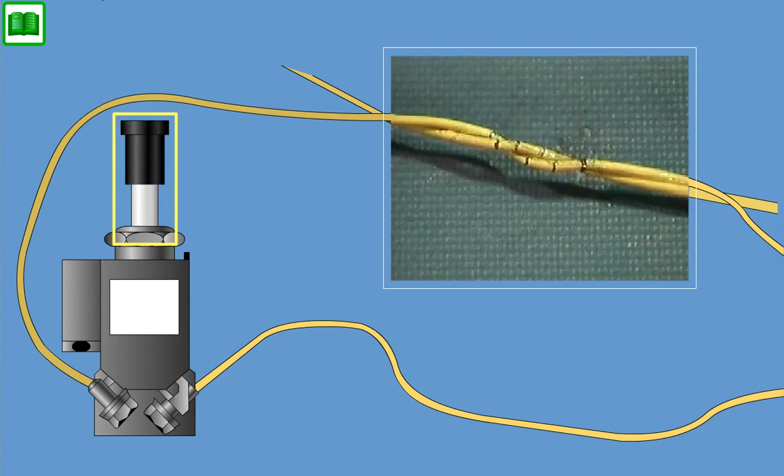The circuit breakers are thermal-type devices with temperature compensation. When subjected to an overload current, the breakers will trip open after a predetermined time. The circuit breakers are the free-tripping, push-pull, on-off, manual actuation type. The CB auxiliary contacts are normally open, polarized with a blocking diode.

The AC circuit breakers provide protection of supply lines and cabling for all loads whose power is sourced from the AC supply system of the airplane. The AC and DC circuit breakers are located in the left integrated control center, right integrated control center, and in the essential integrated control center.

On the AICC, only DC circuit breakers are installed. Some fuses are also installed on the front panel of the left, right, and essential integrated control centers. Additional circuit breakers are located in the flight deck as left and right circuit breakers side panels.

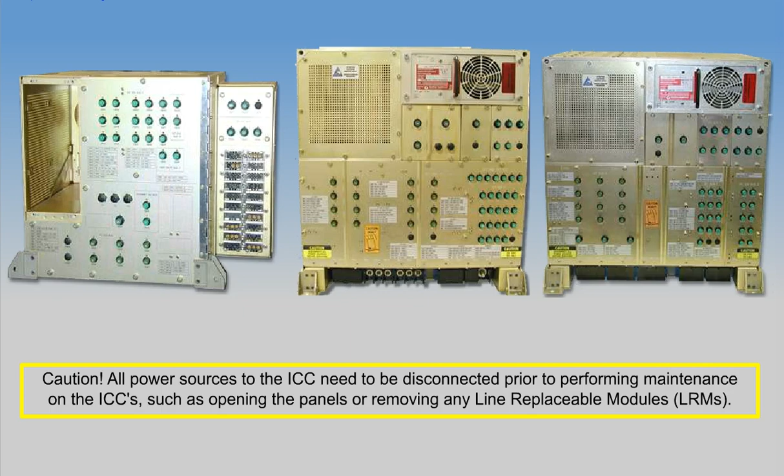Caution! All power sources to the ICC need to be disconnected prior to performing maintenance on the integrated control centers, such as opening the panels or removing any line replaceable modules.

The upper AC Bus 1 CB panel can be released by unscrewing the 4 captive screws and pulling the panel away from the left integrated control center. The wires are long enough to enable replacement of any of the 3 CBs or 2 fuses.

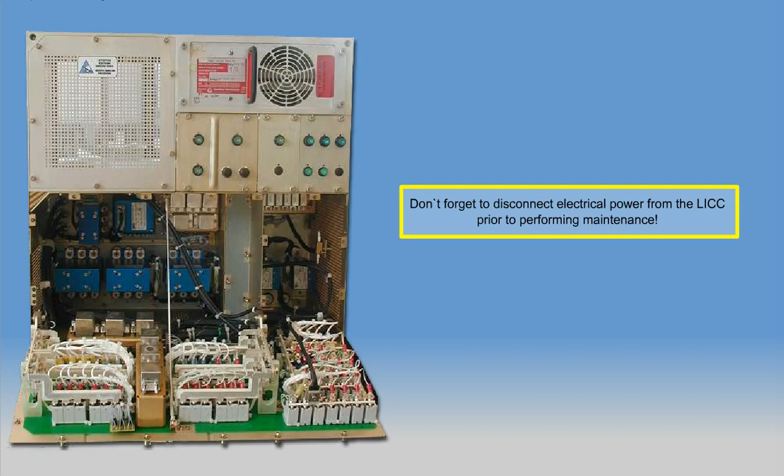The lower front access panel of the left integrated control center can be opened after releasing the 11 captive screws, allowing easy access to the circuit breakers and other components inside. Don't forget to disconnect electrical power from the left integrated control center prior to performing maintenance.

Removal and replacement is done by loosening the attached hardware and the interface wire harness.

The Emergency Integrated Control Center provides AC and DC power distribution and protection for the airplane essential, standby, and hot battery buses.

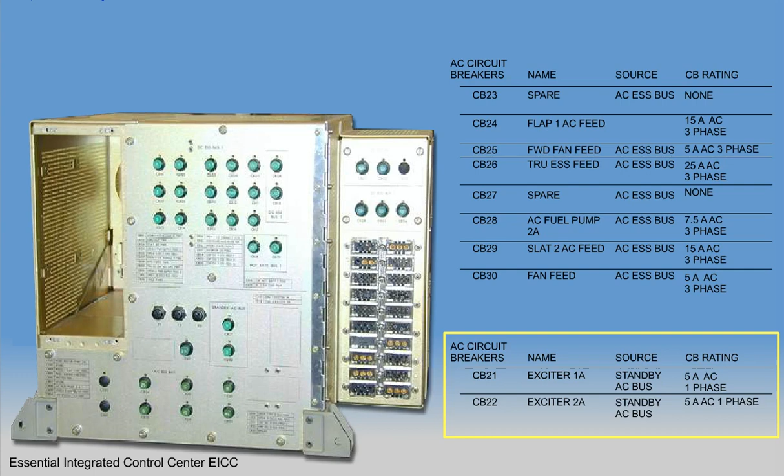There is 1 front panel on the Essential Integrated Control Center. Releasing 11 captive screws provides easy access to the rear of the CB installation.

Reminder: take precautions to ensure proper power and electrostatic discharge safety considerations while performing maintenance on the open ICCs. Electrical power must be disconnected. An ESD wrist strap must be worn since there are static-sensitive modules installed in the ICCs.

Direct current power distribution routes primary DC power to the aircraft through sub-assemblies located in the left integrated control center, right integrated control center, Emergency Integrated Control Center, and Auxiliary Integrated Control Center.

The 2 main DC buses, DC Bus 1 and DC Bus 2, can receive primary DC power from 2 main DC channels coming from Transformer Rectifier Units 1 or 2.

The 3 essential DC buses, DC Essential Bus 1, DC Essential Bus 2, DC Essential Bus 3, receive power from either of the main DC buses, the essential DC channel out of the essential TRU, or either of the 2 battery channels.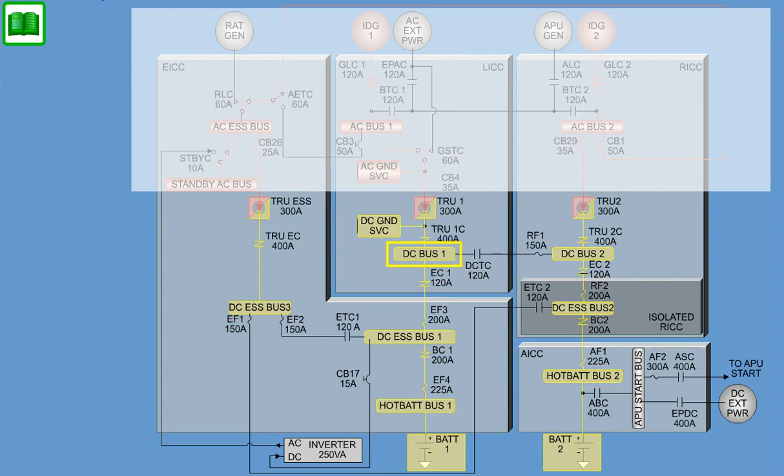All 4 integrated control centers have circuit breakers that provide DC power control and protection to a selection of aircraft electrical loads. The 2 SPDAs are an integral part of the electric power generation and distribution system.

The SPDAs provide control and monitoring of the primary DC distribution and of DC secondary loads.

Other DC system control is accessible using manual switches on the electric system cockpit control panel.

The two main DC buses, 3 essential DC buses, and 1 ground service bus distribute power to various aircraft electrical loads, either through DC circuit breakers or through secondary power distribution assemblies 1 or 2.

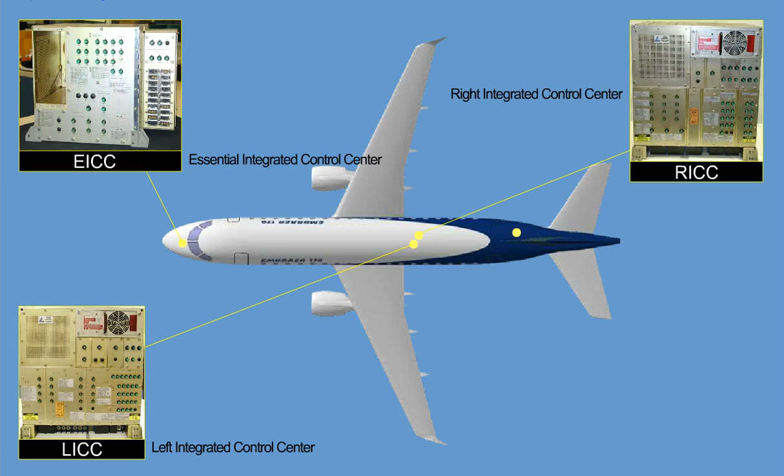Primary DC power is distributed by line replaceable units, located in the following main components: left integrated control center, right integrated control center, essential integrated control center, and auxiliary integrated control center.

Secondary DC power is distributed by LRUs located in the Secondary Power Distribution Assembly, SPDA-1 and SPDA-2.

The left integrated control center provides primary power distribution and protection for the main DC buses located on the left side of the airplane. The left DC buses are DC Bus 1 and DC Ground Service Bus.

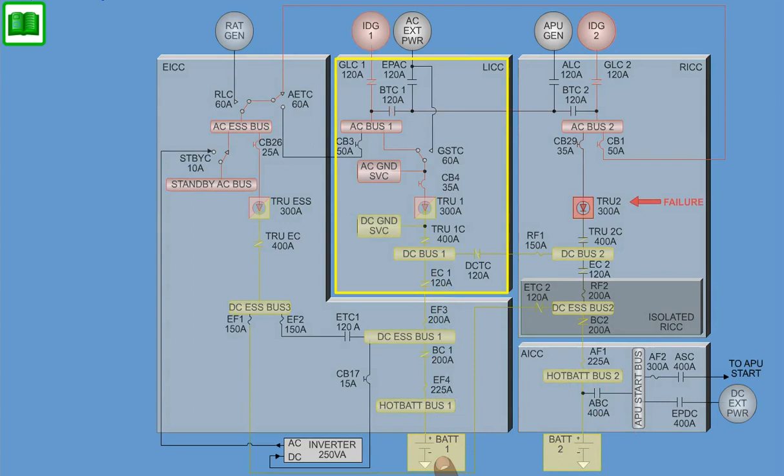The left integrated control center performs the following functions of DC distribution: charging battery 1, using DC Bus 1 as a power source for DC Bus 2 of the right integrated control center, and as a power source for DC Essential Bus 1 of the Essential Integrated Control Center.

The right integrated control center provides primary power distribution and protection for the main DC buses located on the right side of the airplane. The right DC buses are DC Bus 2 and DC Essential Bus 2.

The RICC performs the following functions of DC distribution: charging battery 2, using DC Bus 2 as a power source for DC Bus 1 of the LICC, using the isolated DC Essential Bus 2 as a power source for DC Essential Bus 3 of the EICC, and as a power source for Hot Battery Bus 2 of the AICC.

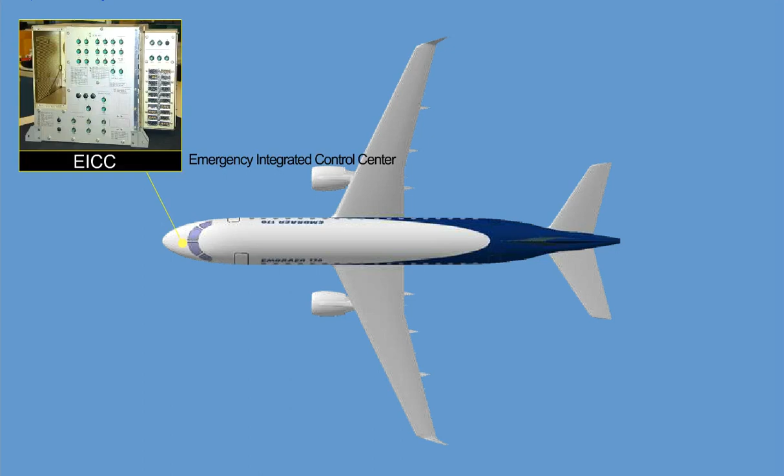The Emergency Integrated Control Center provides primary power distribution and protection for the DC Essential buses located on the airplane. The essential DC buses are DC Essential Bus 1, DC Essential Bus 3, and Hot Battery Bus 1.

The EICC, Emergency Integrated Control Center, performs the following DC distribution function: uses DC Essential Bus 3 as a power source for DC Essential Bus 1, which supplies the AC inverter.

The Auxiliary Integrated Control Center provides power distribution and protection for the APU Start Bus located on the airplane. The AICC performs the following function of DC distribution: it uses Battery 2 and DC external power as a power source for the APU Start Bus, which supplies the APU starter motor.

On the multifunction display, any operational status of the electrical distribution will be presented in the form of marked colored icons or colored flow tubes. In case of a malfunction in the electrical distribution system, the EICAS will display the associated message.

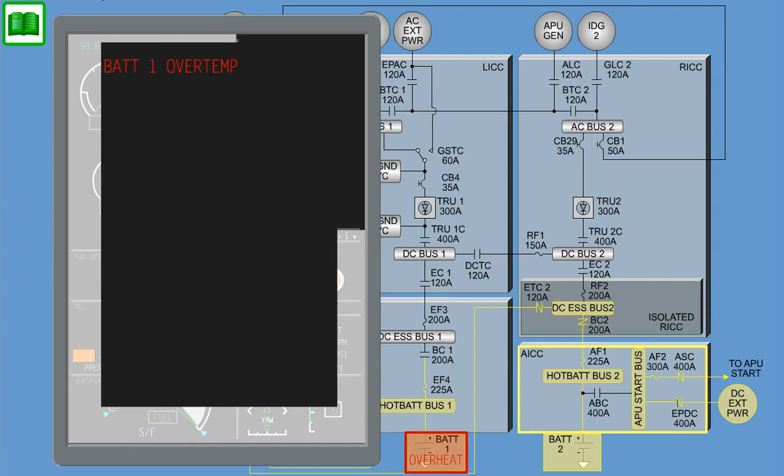Secondary Power Distribution Assembly, SPDA-1, is located in the forward avionics bay, and SPDA-2 is located in the mid avionics bay. In the DC distribution system, SPDA-1 provides secondary power control and monitoring of 3 integrated control centers: left, right, and essential. SPDA-2 provides secondary power control and monitoring of all 4 ICCs.

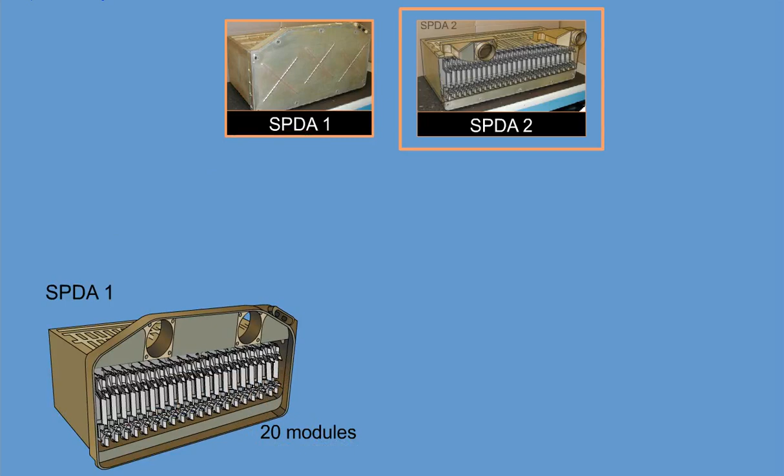SPDA-1 consists of 20 slots for modules. SPDA-2 has 26 modules that are individually replaceable. Some of these modules assist in DC power distribution. An EICAS message, SPDA fail, indicates a total failure of any module in SPDA-1 or SPDA-2, or a loss of communication with the other SPDA. This indication is shown as an advisory message.

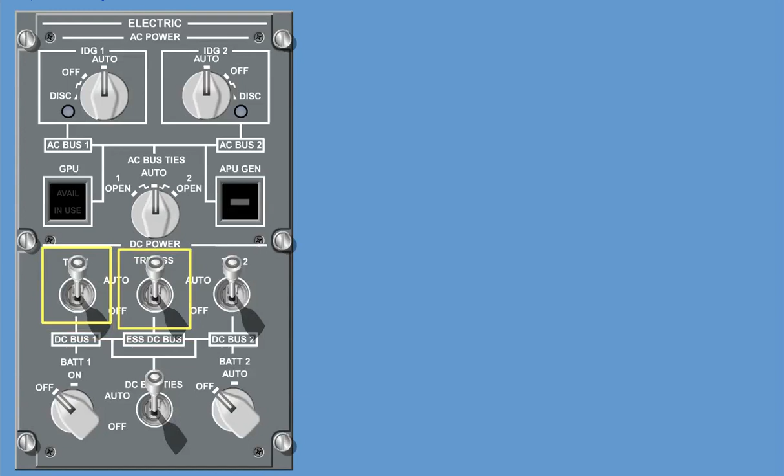These switches allow the flight crew to disconnect the DC distribution system from automatic operation. They also allow the flight crew to activate or disconnect both batteries. During the APU start sequence, the Auto mode opens the Battery 2 contactor automatically.

The DC circuit breakers provide protection of supply lines and cables for loads whose power is sourced from the DC supply system of the airplane. The circuit breakers are mounted on circuit breaker panels located on the front of the left, right, essential, and auxiliary integrated control centers. Only DC circuit breakers are mounted on the AICC.

The feeder wire bundles and load output wire bundles to the DC circuit breakers are separate from the wire bundles to the AC circuit breakers. The power input and power output wires and auxiliary sense contact wires are all bundled separately to avoid disturbances by induction.

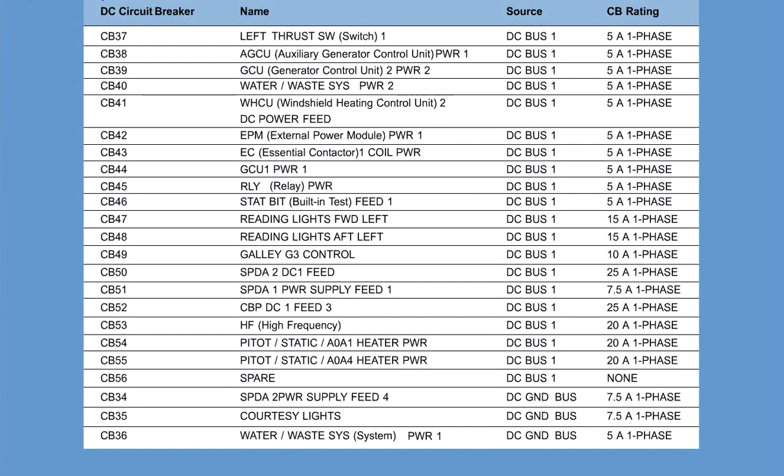This shows the first front panel location of 15 DC Essential Bus 1 CBs, the second front panel location of 3 DC Essential Bus 1 CBs, the third split front panel location of 5 DC Essential Bus 3 CBs, including 1 spare CB, and the fourth front panel location of 2 Hot Battery Bus 1 CBs. The list shows all DC circuit breakers and their ratings installed on the front panel of the EICC.

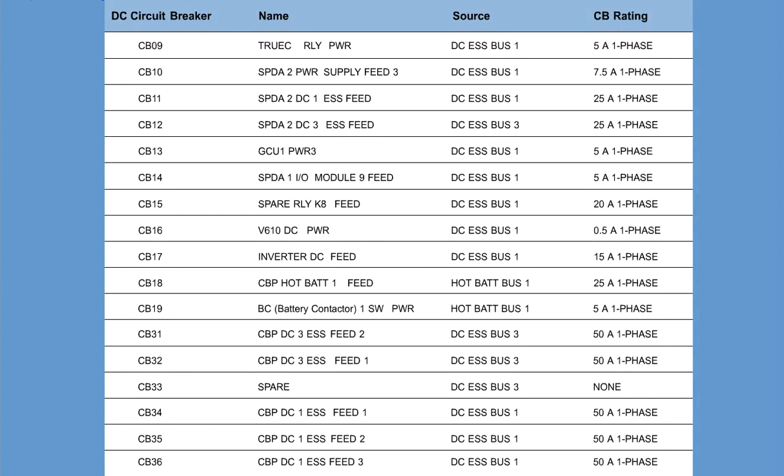Caution! All power sources to the ICCs need to be disconnected prior to performing maintenance, for example, opening the panels or removing line replaceable modules.

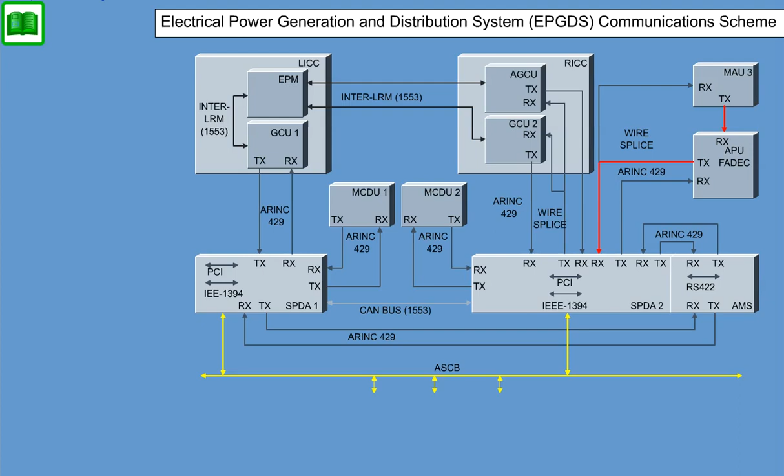The Electrical Power Generation and Distribution System, EPGDS, communications scheme provides an interface with the Avionics Standard Communications Bus, ASCB, enabling the EPGDS to provide system information via the Modular Avionic Units, MAUs, to the Engine Indicating and Crew Alerting System. On the interactive EPGDS communication schematic, you can view the different components, their locations, and their functions within the electrical power generation and distribution system.

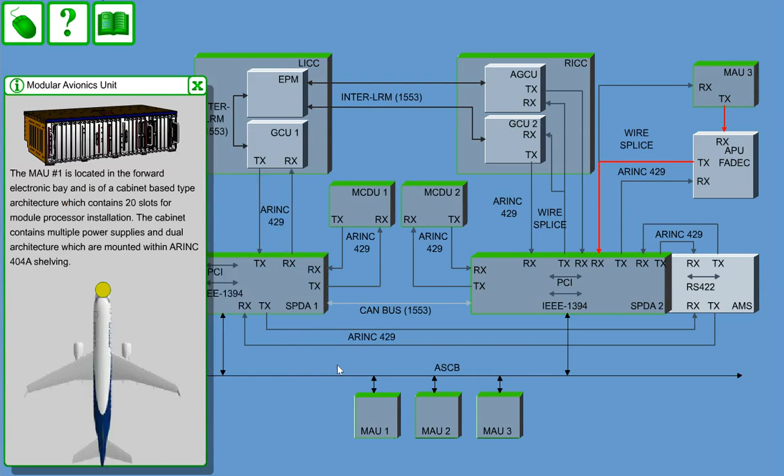Operation of the electrical system can be monitored by the flight crew on the MFD Electrical System Synoptic page, which consists of both analog and discrete data. Analog data is used to display actual values like voltage, current, and generator frequencies, while discrete data is used to indicate electrical flow paths and conditions of batteries or generators. The CAS field on the EICAS panel informs the crew in case of a system failure by generating a warning or caution message and an advisory message to indicate system status.